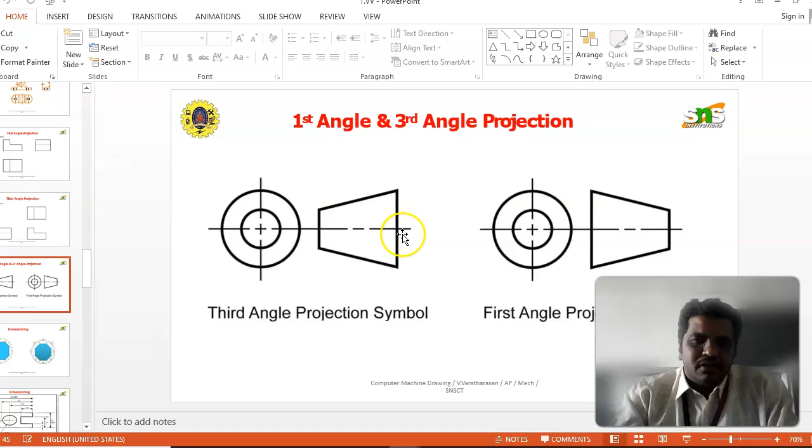In this video, this is our first slide. For the first angle and third angle of projection, the symbolic representation is shown in the figure. We need to draw this symbolic representation on each and every drawing sheet in the title block. By using the symbolic representation, we can identify whether the particular drawing is relevant to first angle or third angle of projection. In Asian countries, we always follow the first angle of projection. Some parts of the US and UK follow the third angle of projection. So this is the symbolic representation.

The next one is dimensioning. We give so much importance to dimensioning because, not only in industrial drawing but also in the normal manual drawing methodology, dimensioning and lettering give a very clear representation. The presentation of the particular drawing should be good and legible. Only then can the observer, say a machinist, identify whether the dimensions of the particular product are understandable. So here are some dimensioning methodologies and tools followed in the previous manual drawing method. These are the representations.

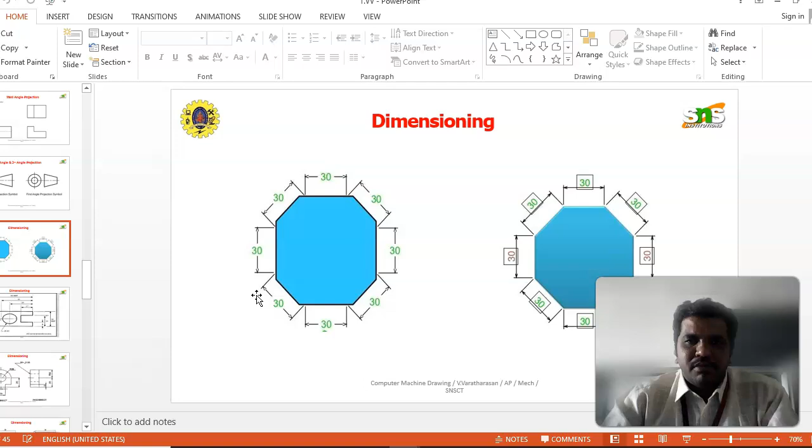We can give the dimension representation by using an arrowhead. The arrowhead is a closed arrowhead with shading. An unclosed arrowhead without shading is a bad representation, and it is an incorrect method. So we need to follow the correct method.

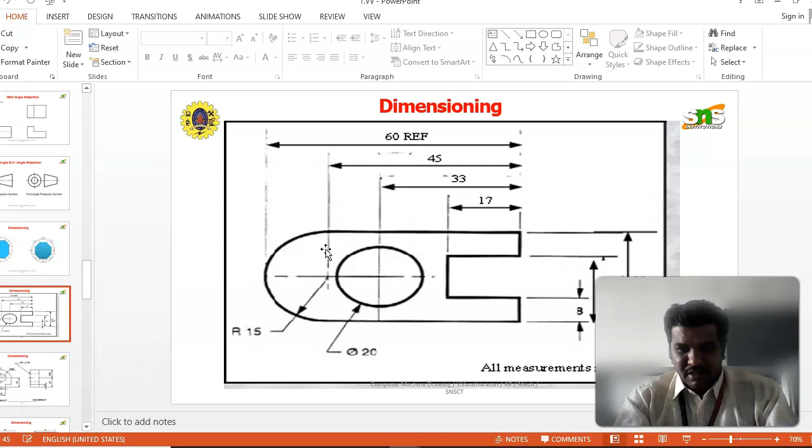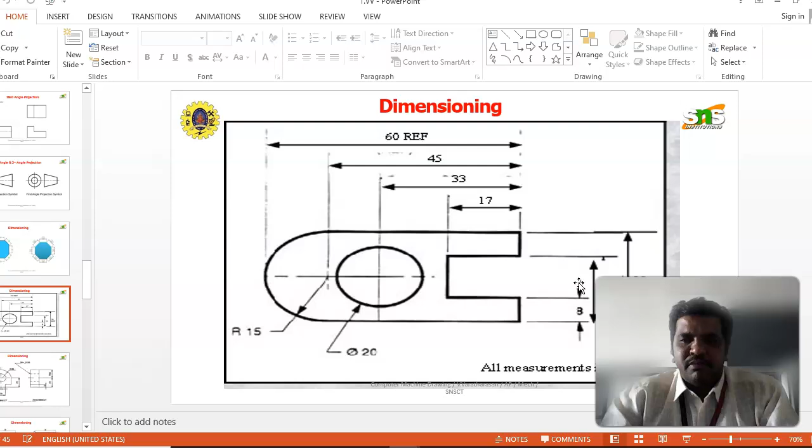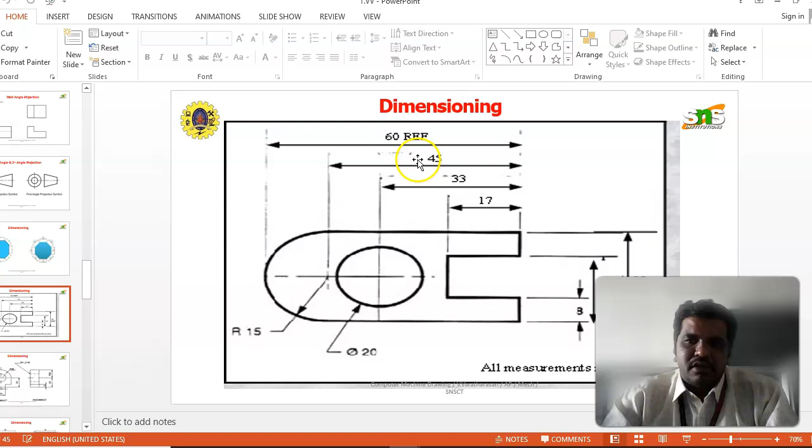This is also dimensioning using a mechanical part. Here they have given a length dimension, the diameter of the circular hole, the radius of the circular hole, and the distance between the slots. These are the width of the particular product. These measurements are given, but in the title block they state that all dimensions, all measurements, are in millimeters. This is a very important terminology we use in the title block. Without stating that all dimensions are in mm, it could be read as centimeter or meter. So a lot of dimension terminologies we are going to use.

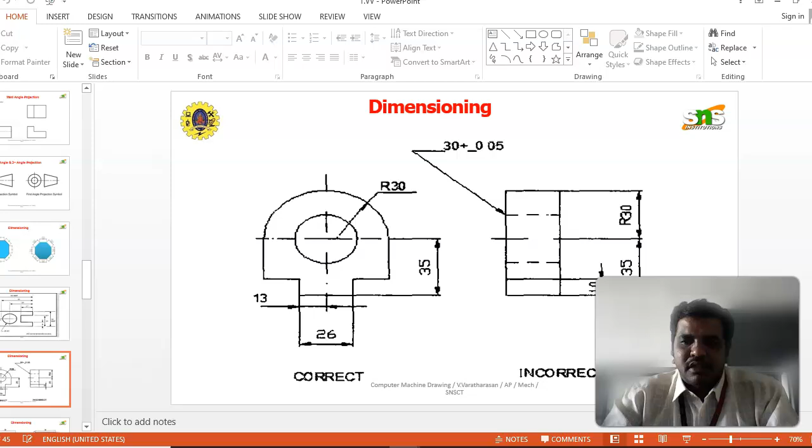Here we are giving the comparison between the correct and incorrect diagram. The left side is the correct diagram, and the right side is the incorrect diagram. The correct diagram shows the symbols and arrowhead symbols used in a legible manner. The incorrect diagram uses them in a non-legible manner. So that is the thing.

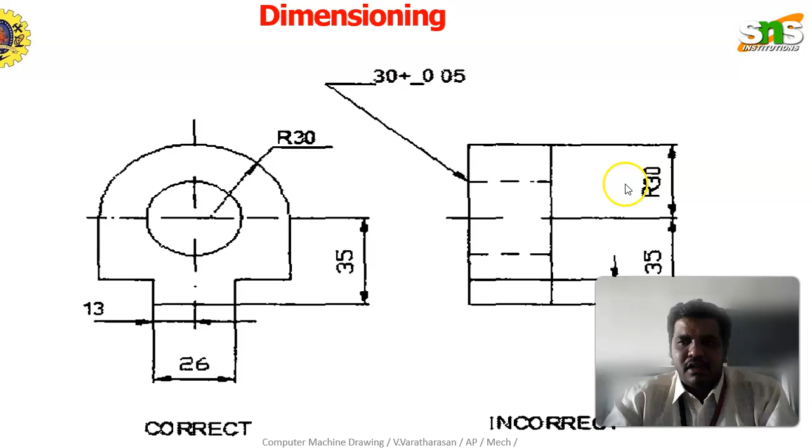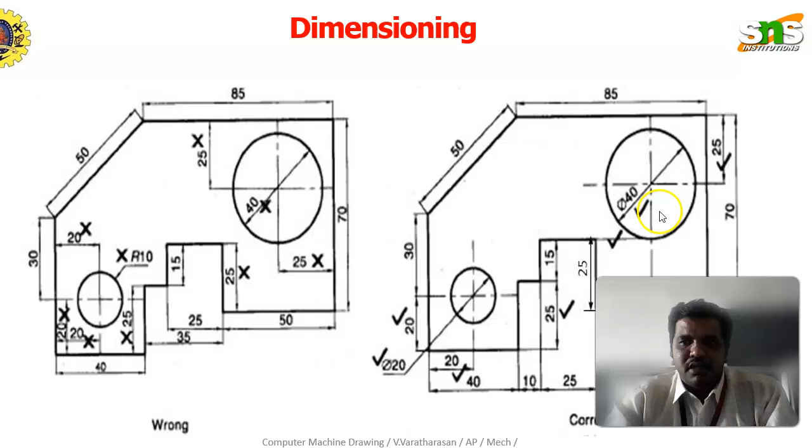So here also the same thing will be happening. The 50 is the measurement of the particular square rod. In the particular square block, there is a circular hole over here. For the circular hole, the dimension of the hole by the center point, that distance will also be given, and the overall length and width measurement will also be

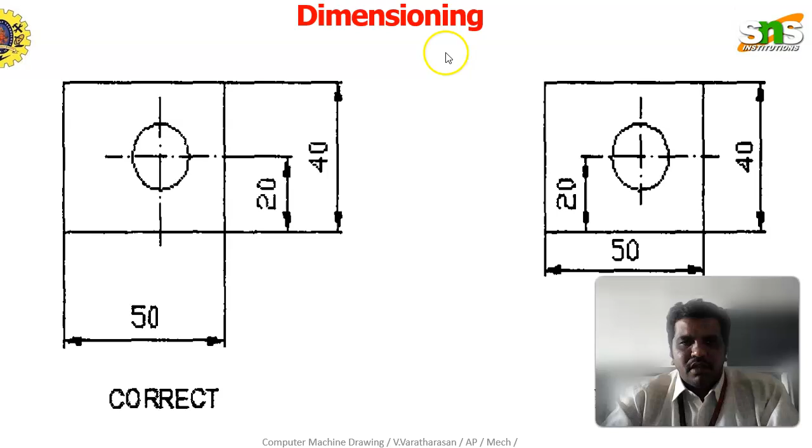given. So in between the dimensions, we must give a proper ratio of gap. Without gap, if we are representing the dimensions over and over, it will not look good, and also it will be an incorrect one. So here are the correct dimension and the incorrect dimension methodology in the diagram representation.

In the cross-sectional view, they are representing the sectional lines. So these are the sectional lines. 45-degree lines will be shown in the figure now. This section line we always represent in the sectional view of the particular product.

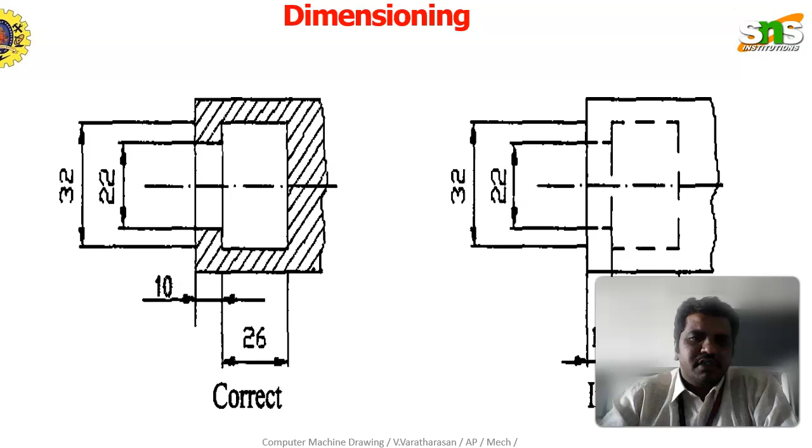So here lettering is another important terminology, and it is an important part of the particular diagram. The lettering should be very legible. If you are using lettering, it should be in a proper format. Both alphabets in capital letters and small case letters, and numerals also, should be given proper space, by using an HB pencil. So that is a very important thing.

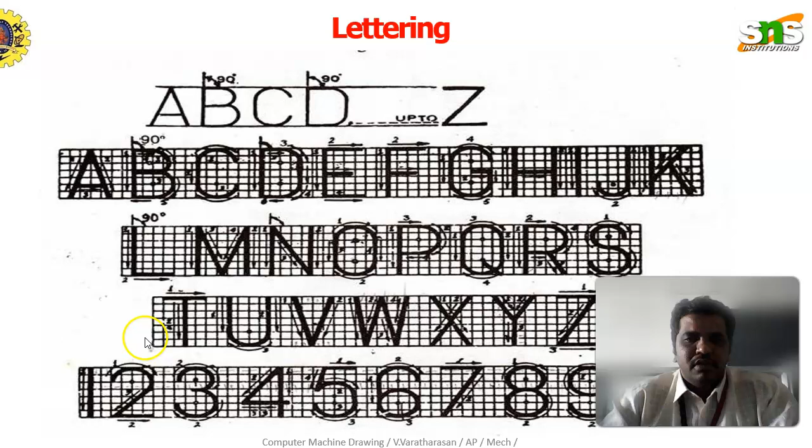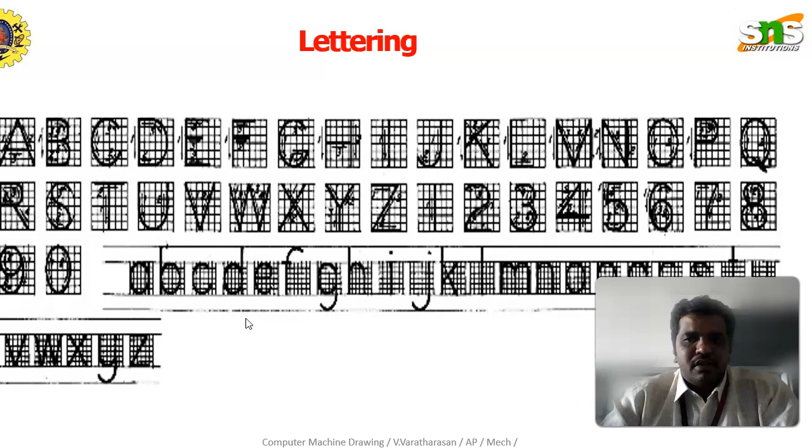Here there are three types of pencil we are using: H pencil, 2H pencil and HB pencil. With the HB pencil itself we are using three types of thickness in a single representation, but in the manual drawing method they are using 2H and HB separately. So this is the proper lettering writing format given here. The lettering, both the capital and the small case letters, is represented in this slide.

So the next one is the circle, oval, triangle, square, trapezium, diamond, rhombus, parallelogram, rectangle, pentagon, hexagon, heptagon, octagon, nonagon, decagon. So these are the different types of methodologies, and here after the lettering, if you are given these types of surfaces and planes, for each and every plane we just want to draw a proper format. If you are going to draw the circle also, there is a certain method and procedure for drawing the circle, and the same for hexagon and pentagon.

If you are going to draw the pentagon plane or lamina sheet, with the pentagonal shape we can't draw it directly; we draw with respect to the base side dimension. By using the base side dimension and the 108 degree inner angle or 72 degree external angle, take the angle of representation. On the angled line, we can measure the particular baseline length. Then, by using a compass or divider, we can represent the measurement in the pentagonal shape.